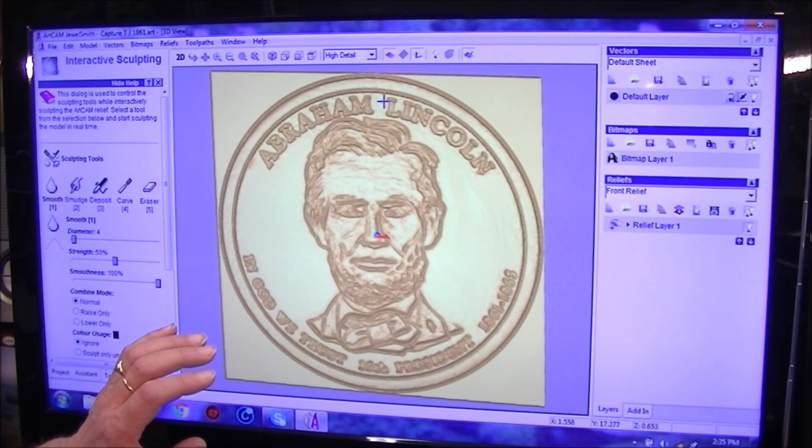The more work you do now, the better result you're going to get at the end. So for those people out there that do write in occasionally, that probably don't understand the process of what you need to do to be able to create a 3D relief from just a picture straight off the net. Well, this is showing you that it is not just a simple process and you let this machine do the work, because in actual fact there can be quite a lot of preparation work, if I can talk to you and do this at the same time, quite a lot of preparation work required to make a 3D relief or to manipulate a 3D relief. And so that is how it's done.

So I'll just very quickly now finish off there, and I think maybe a little bit, let's raise that up a little bit. Abe's brow is a little bit crinkly. I know he was an old guy, but we'll just smooth some of the crinkles out a little bit, give him a bit of a facelift, just like this. I don't want to make him look too young. There you go. So that's cleaned it up a little bit. I'm fairly happy with that now.

And don't forget, this is magnified 100 times. So it's going to shrink down to something that size. And really, any discrepancies that are left now, you're not going to see, let alone the machine cut it. So what we're going to do now is pull this selection dialog box down, and we're going to say apply, and there we go. What I want to do now is I want to draw a circle around this, because I don't want to machine this area out here, because this square represents the size of our work.

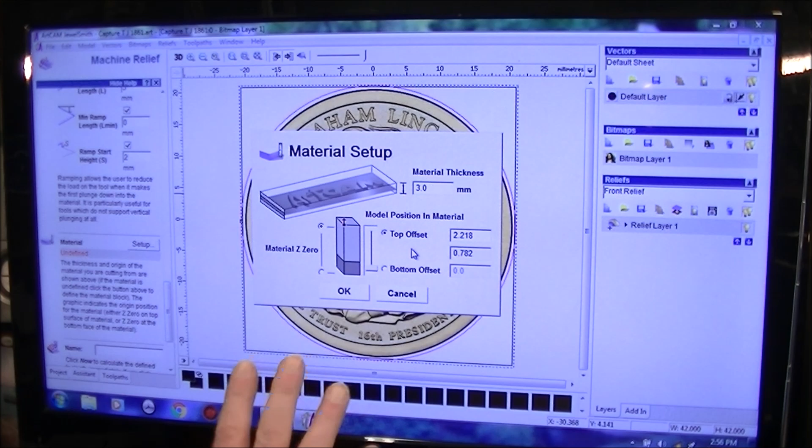Okay, there are other occasions when you're working on other materials, wood or whatever, that you want the 0 at the bottom, or the model position in the material at the bottom. You will get to know that by experience. So we're going to go okay with that.

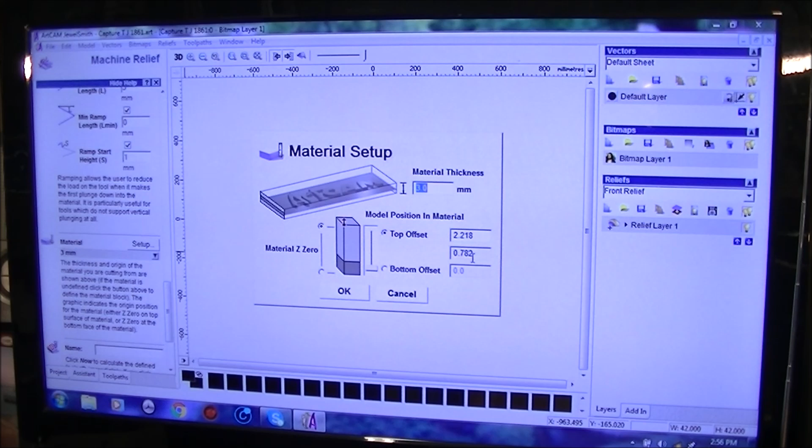Ooh, what happened there? See, now something strange happened to me. Material setup, material thickness, 3. All okay. I don't know what happened to that. I'm going to select that, and I'm going to delete that. I don't like it. I don't know why that occurred. That was a glitch, and you saw it live. I can't explain what happened there, but anyway.

So what I'm going to do now is, this is the name of the actual tool path, or the G code. This is going to be the name of it. You have to label it something. I abbreviate everything. As long as I can understand what it is, it's fine. So there's Mr. AB.

And I normally give some idea of, well, okay, what tool is it? Well, it's a conical tool, so I just put con, and then the measurements, because I might in 6 months' time think to myself, oh, I think I'll make that coin again, or someone asks me to make one for them. I can just look at this, and I know exactly what the dimensions are. I don't have to pull out a map. I know then what tool to use, and I know the dimensions of this actual coin.

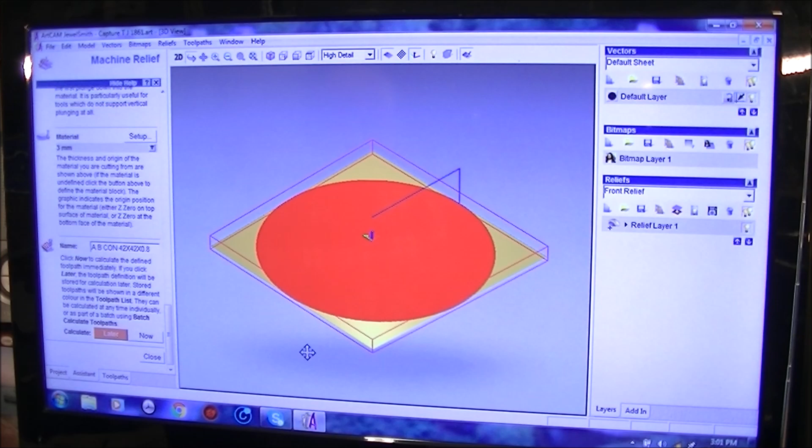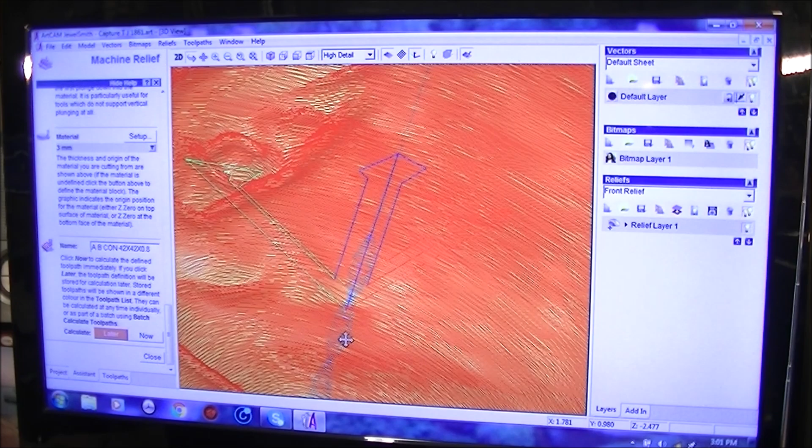The computer has made absolutely millions of calculations, and if you see it is all red. Well, if you zoomed into it, you would see it's all individual lines. There's the center. And you see spiraling it from the center, and that's exactly what it's going to do. It's going to go round and round and round. So each one of those is about 1/1000th of an inch.

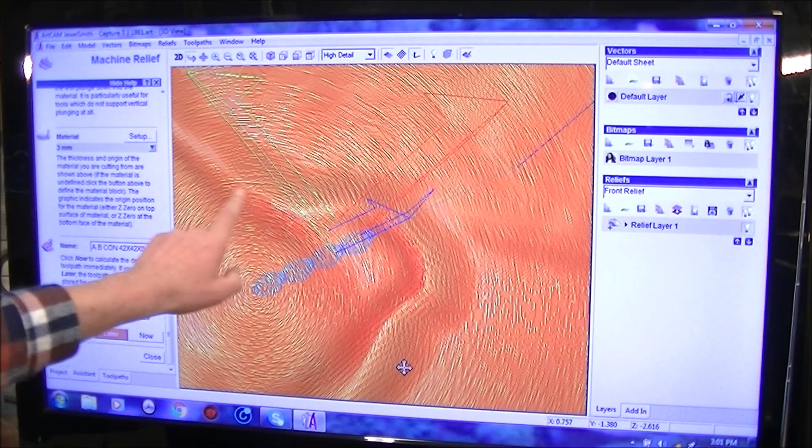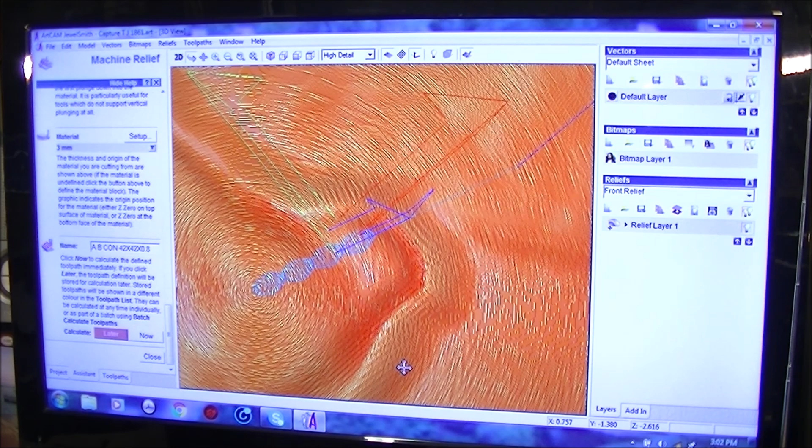And so you can imagine, if you look at this as a three-dimensional map, where you have the valleys and the peaks and what have you. I mean, this is part of his nose. How many different calculations and commands the computer has written into Mach 3, into the G code. Now, I can't personally write G code, and if you can imagine looking at this, I wouldn't want to. So I'm glad that there's a program designed to do that job for me.

So there we go. Okay, so the next job we have to do, now we come here and we say we want to save the toolpath. Can you pick that out? Yep, over there. Just press that little icon, and there's our toolpath there, and we are going to save it. Okay, so I'm going to scroll down through here, and we're going to get to G code. You don't have to do this every time, it's just I haven't used this program. Here we go, G code. So standard G code in millimeters, that one.

Okay, so as you can tell by this, you can save this in hundreds of different types of code. But for what we use with Mach 3 and NC Studio, we're going to use standard millimeter G code. It's going to take some time to save because it's a big code.

Okay, so that is exactly how to take a photograph of a coin straight off the internet, straight off Google, and put it into ArtCam. There are other programs that will do this. You can actually do this in ArtCam Express. You can do it in VCarve Pro. You can do it in Aspire. All the ArtCam type programs. You know, there's many programs that you can do this with. You don't have to go with this one. My preference is this one because I like the program. I'm used to it.